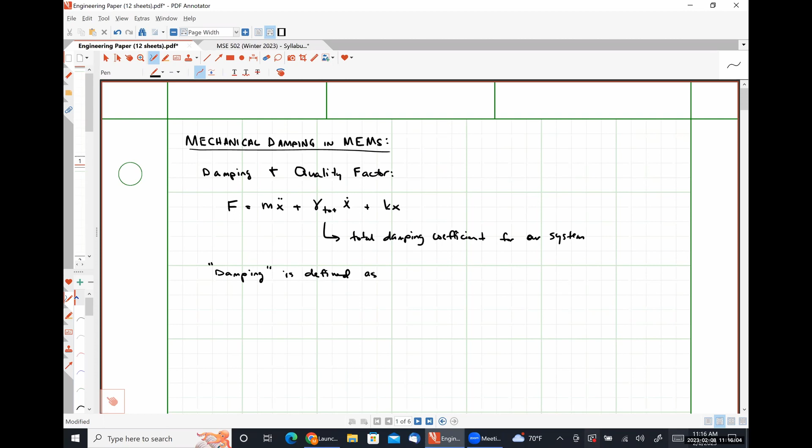Okay, so damping is defined as the restraining of vibratory motion by the dissipation of energy.

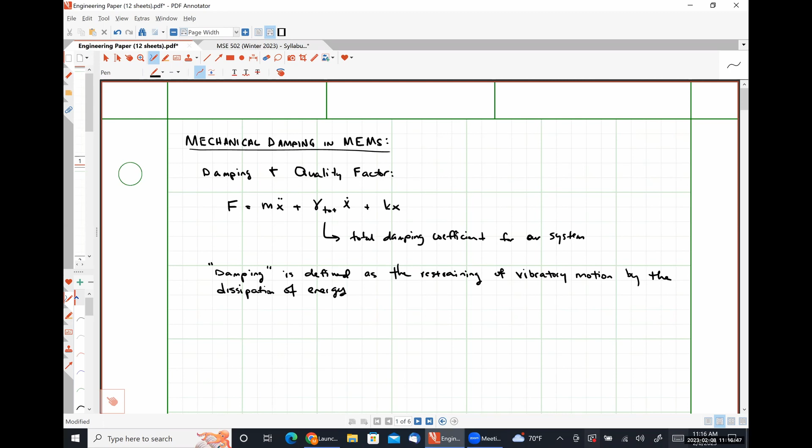So we just talked about how there are numerous damping mechanisms in MEMS. So when multiple loss mechanisms are present, the damping forces add, and the total damping coefficient is simply the sum of the damping coefficient associated with each of the different loss mechanisms.

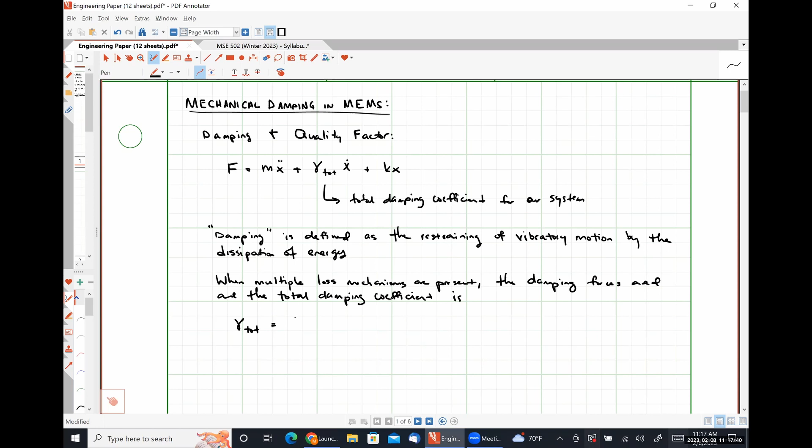So gamma total would be gamma 1. Why is this not writing? Plus gamma 2 all the way out to some gamma n, where each of those individual gammas represents, again, the damping coefficient for each particular loss mechanism. Okay. Our damping coefficient is measured in Newton seconds per meter. Okay.

It is actually relatively uncommon to deal with damping coefficients by themselves. Instead, most engineers talk about mechanical losses in terms of what's known as a quality factor. So, quality factor is often used to represent mechanical losses in a system.

Okay. Quality factor is defined as the ratio of the initial stored energy to the energy lost in 1 radian of oscillation for a vibrating system, okay? So from this relationship, we can see that Q and gamma have to be inversely proportional because Q represents stored energy over losses and gamma itself represents losses.

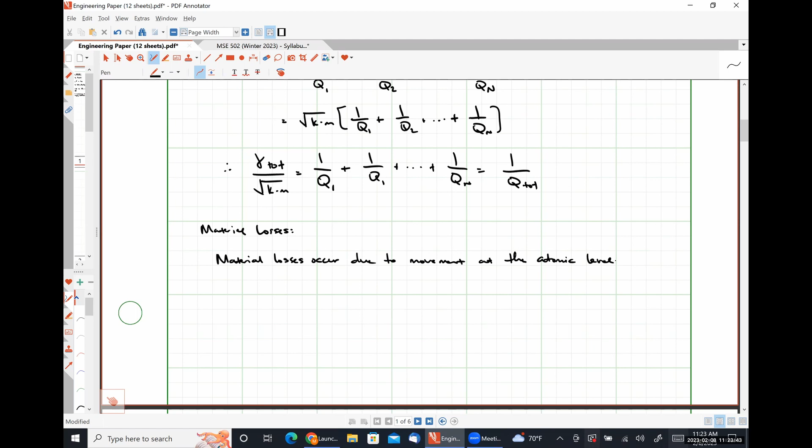So material losses occur due to movement at the atomic level that results in the generation of heat. Losses due to phonons. Yeah, so it's like an internal friction. As the atomic structure of the material vibrates, it heats up because of interactions between the individual molecules that make up the material itself.

So this internal friction or these material losses is the intrinsic limit because this is the material acting on itself, creating some form of energy dissipation because it's converting energy into heat with everything else ignored. So this is the best case scenario, right? So the quality factor associated with material losses is the highest number, right?

These material losses depend on temperature, the vibrational frequency, so what frequency we are exciting our system at, and the vibrational mode

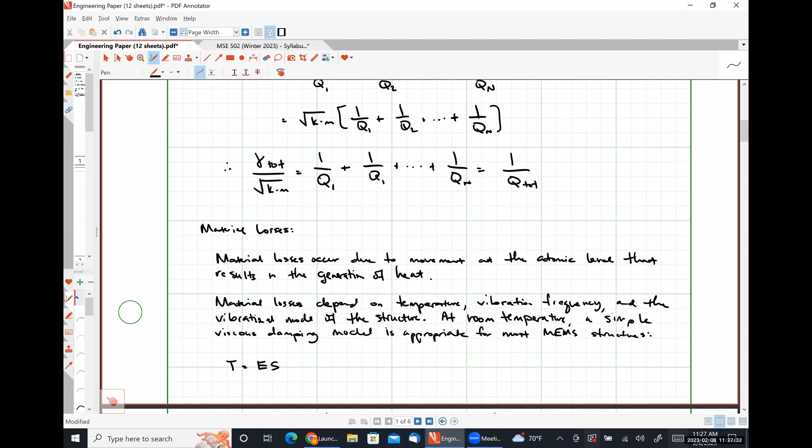Okay, so at room temperature, a simple viscous damping model is appropriate for most MEMS structures. So we are going to simply take our regular stress strain relationship, T is equal to ES, and then we are going to introduce viscosity into our equation. So this is mu gamma.

Viscosity, making sure I spell it right, measured in Newton seconds per meter squared. And this viscosity acts on the time derivative of our strain. So in the frequency domain, much like we've done other times, taking the derivative with respect to time is multiplying by a factor of j omega. So this is going to look like ES plus j omega mu gamma times S.

So this term here represents elastic damping losses for a particular vibrational mode.

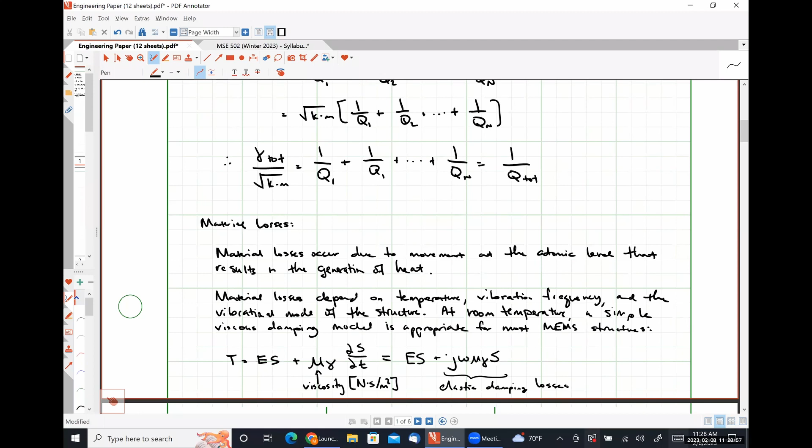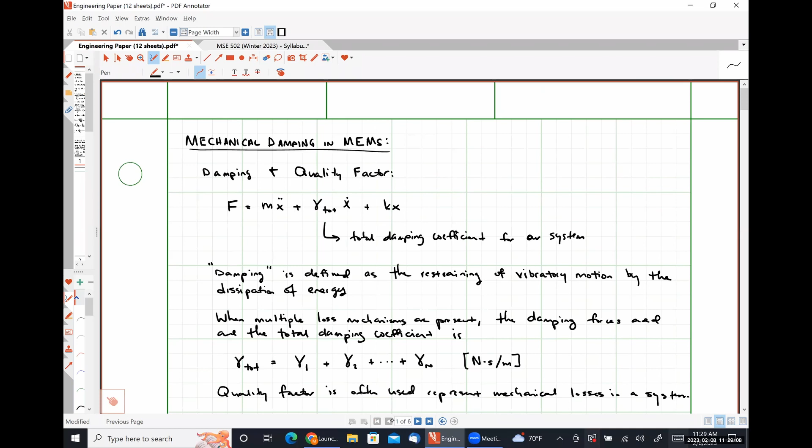Is it okay that I went to the next page, or do I need to go back? Oops, too far. All right, so I don't know how I finally managed to get it to scroll pages instead of jumping to the top of the next page. I'm just gonna not touch anything because I wish it would have been doing that for months.

So the quality factor associated with material losses, I'm going to give it subscript QI. We'll talk about why that is in a minute. It's simply the Young's modulus divided by our viscosity multiplied by our vibrational frequency omega. So this is QI because this is commonly called the intrinsic quality factor, which once again represents effectively the highest possible quality factor that could be achieved.

Now, something that's fairly interesting here is that E, Young's modulus, is a material property, and viscosity, mu sub gamma, is also a material property, which means the product of our frequency and our quality factor has to be a constant. So this really represents a scaling law for MEMS devices, right?

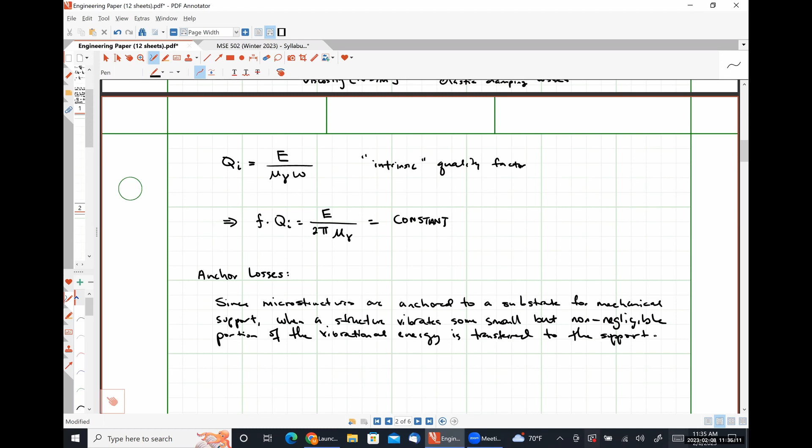So anyway, since microstructures are anchored to a substrate for mechanical support, when a structure vibrates, some small but non-negligible portion of the vibrational energy is transferred to the support. So these are what we call anchor losses.

These anchor losses depend on the location of the support point and the type of anchoring used. So the reason why we're not going to introduce a whole heck of a lot of math here is because analytical analysis is practically impossible to do to determine this. We have to use computer simulations and all that kind of stuff to do this for the most part.

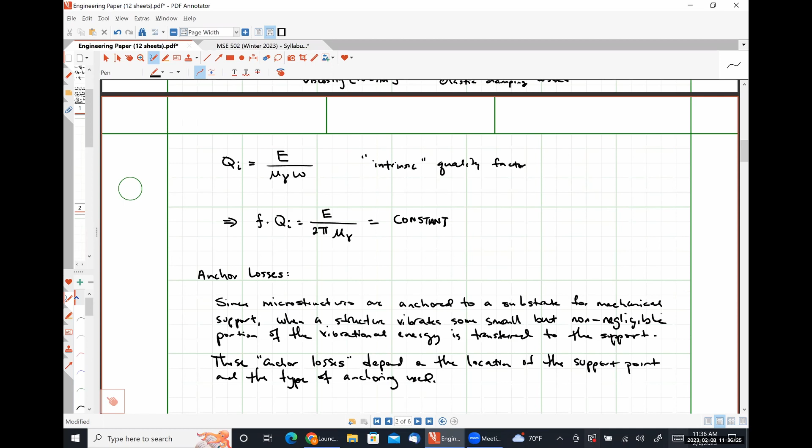Now, on many occasions, we don't really particularly need a high quality factor. So we don't care a lot about the energy that's transferred into our support system. So for an example, in an accelerometer, anchor losses really aren't that big of a thing. And in actuators, it's not really that big of a thing either.

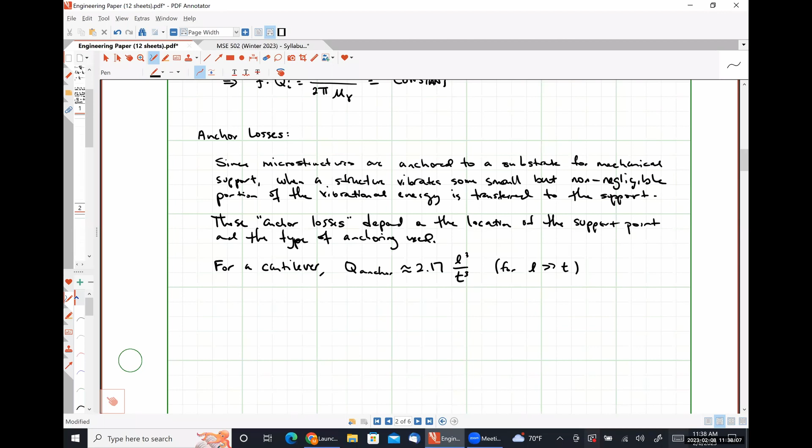That being said, if we have something that we are trying to utilize as a resonator, we typically want to minimize the anchor losses as much as possible because that's literally wasted energy that isn't getting transferred into the vibrational mode that we're trying to establish. So there are some methods here that hopefully qualitatively will make sense to understand why they're used to reduce anchor losses without any numerical support.

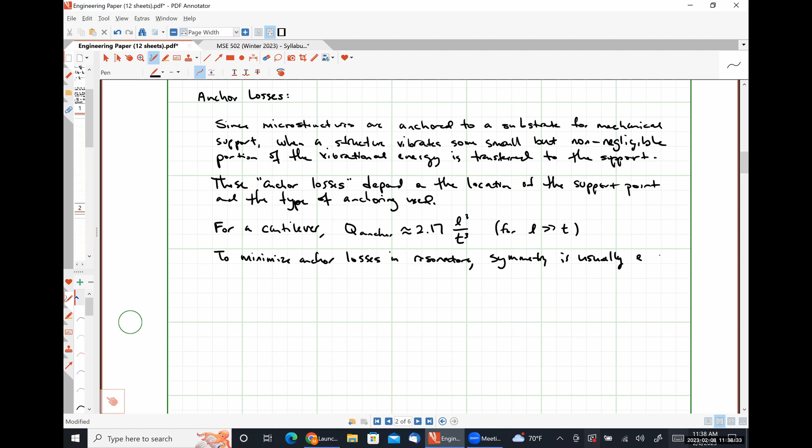So to minimize anchor losses in resonators, symmetry is usually exploited. So I'm going to give you guys a couple of examples here of simple structures. So this first one is what's called a tuning fork resonator, okay? And so we have an anchor on both sides. Now, if we had a single beam, we would experience reasonably high anchor losses for this.

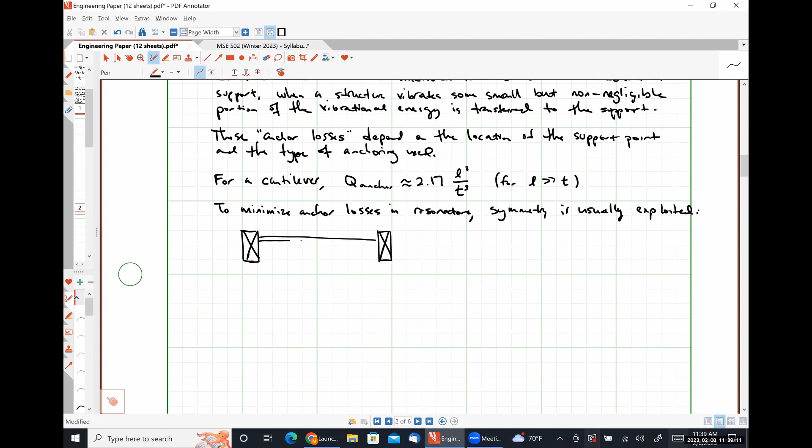So instead, what designers usually do is put two beams in parallel, so that when the system vibrates, one of the beams deflects up and the other beam deflects downward. So let me call this real quick. This is a double-ended tuning fork.

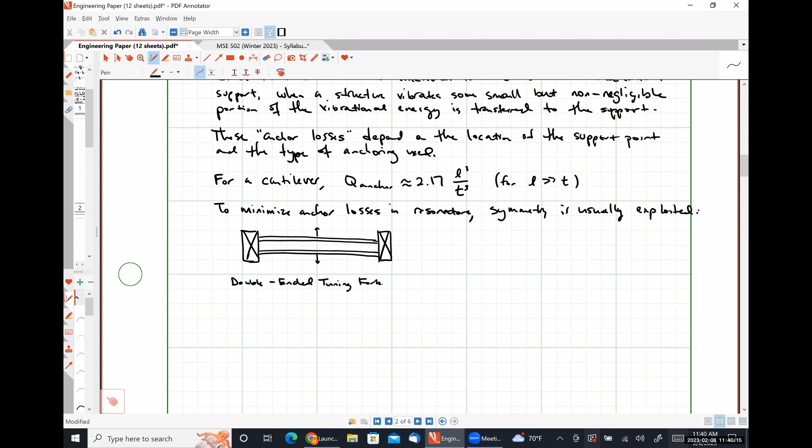So the stresses from the two different resonator arms cancel each other out at the anchor points because they're deflecting in equal but opposite directions. If there is no net stress and strain on the anchor point, there's no energy lost to the anchor point, or the energy lost to the anchor point is significantly minimized. So this is one way that symmetry is used to minimize anchor losses.

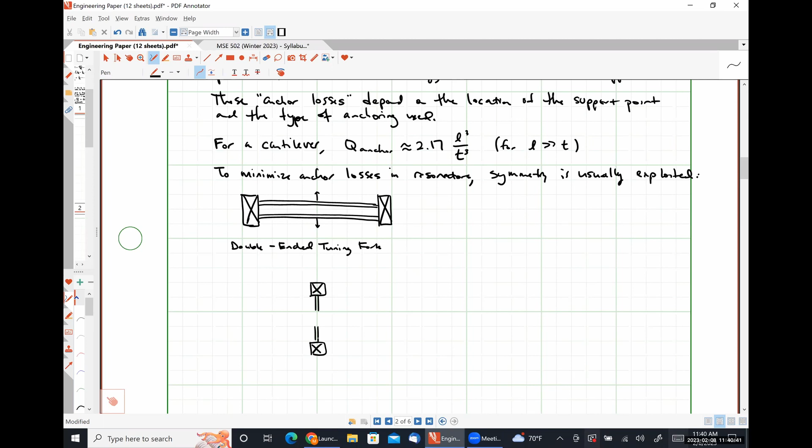Another way, for a different resonator structure. So this would be a longitudinal mode resonator. So let's say that we have an anchor point up here and an anchor point down here. And so this one is choosing the anchor points at a location where the net stress should be zero. So if we have a longitudinal mode resonator, so effectively something like a piezoelectric resonator, where we can cause this material to contract and expand in the indicated direction.

Well, if we locate our anchor points at the nodal point of the resonator where there is no stress, we get no anchor losses and therefore very high quality factors. So effectively, we electrically excite this system and it's vibrating in and out like so, which is how quartz crystal resonators usually work. And we wind up getting very, very low anchor losses and therefore very, very high quality factors, important for resonators where we're using it as a timer. Okay, so that's another way that it's done.

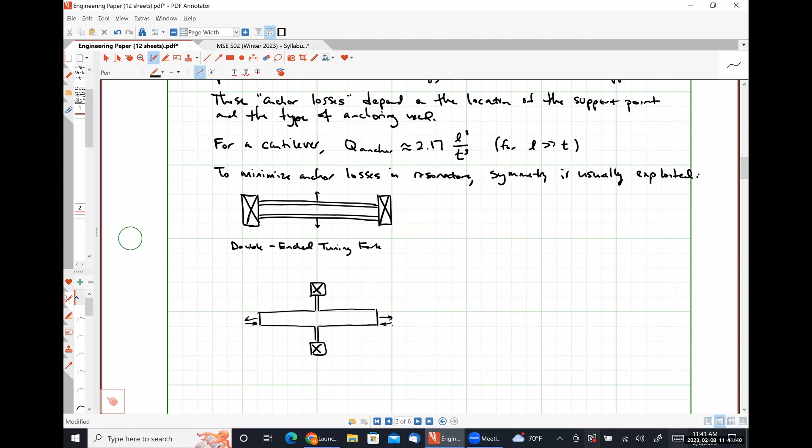This is a longitudinal mode. Let me write this down. Beam resonator, where the location of the anchor points is what's giving us low anchor losses. And then over here on the right, I'm going to draw one more. And so this is going to be a torsional resonator, and it uses a slightly different strategy.

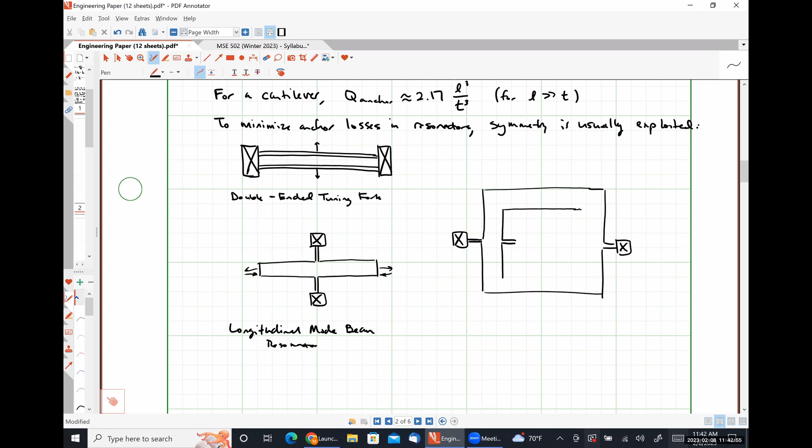Drew that line too long. So this is kind of similar to that magnetically actuated rotational gimbal that we looked at earlier, but the purpose is significantly different here. Okay, and also we only have a single axis of rotation. I'm just trying to put this in a frame of reference to something that you guys have seen, right? So we have a torsional spring here, and the same thing on the other side.

We have an outer resonator and an inner resonator. Because the outer resonator literally contains more material, it has a larger mass and therefore a lower resonant frequency. So effectively what happens in this structure, which is a torsional resonator, the inner resonator will resonate at one particular frequency, a high frequency, and the outer resonator will resonate at a low frequency.

And so all of the vibrational energy of the inner resonator effectively gets decoupled from the anchor because of the outer resonator. Okay. So the losses that are experienced are not in the primary vibrational mode. They're in the secondary vibrational mode of the outer resonator. So that's another means by which anchor losses are minimized.

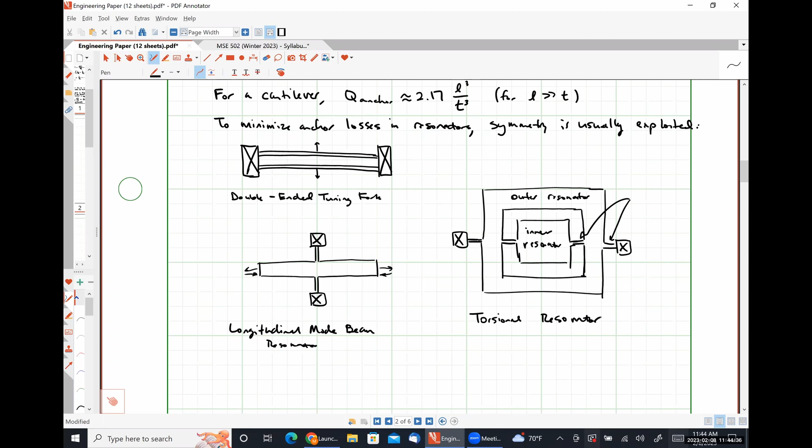Let's talk about surface losses now. We talked about this briefly a little while ago. This discussion is going to be just as brief because there's practically no information on it, or at least nothing really about quantifying it. So surface roughness. Surface contamination.

And the presence of oxide layers, which to my understanding is really just another way of expressing surface roughness, because oxide layers are usually amorphous, so they don't have a nice flat polished surface. Presence of oxide layers may mean the difference between intentional surface roughness and surface roughness as a byproduct of the process. Yeah. So this can all reduce Q of a structure. So that's literally all the information that the textbook had.

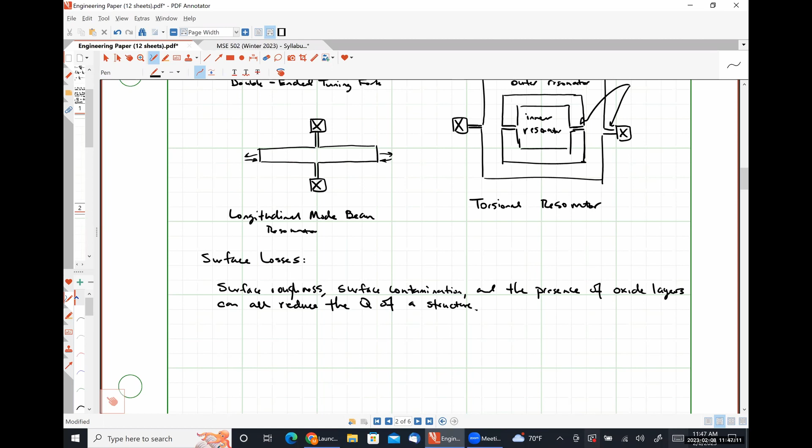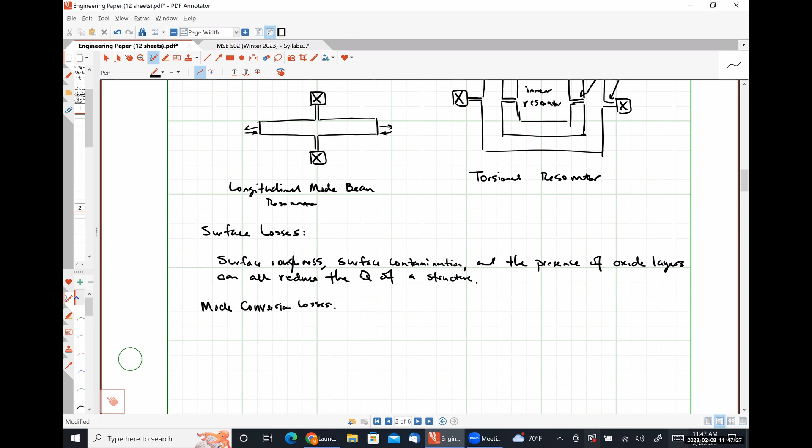So if we have, so let me write this out. For a resonator, ideally, only a single resonant mode should be excited at a given time. That's going to give us the highest possible quality factor. If the structure has multiple resonant modes with similar resonant frequencies, some vibrational energy can be transferred to these parasitic modes.

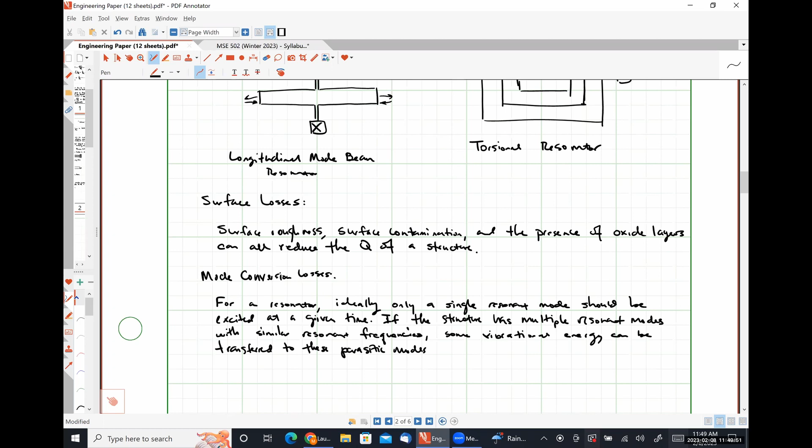So imagine that you were trying to make a resonator out of a cantilever beam, and the thickness of the beam and the height of the beam were of similar dimensions. You would expect the resonant frequency of each of those modes to be close to each other. And if you're transferring energy into one vibrational mode, you can get sympathetic resonance in the other mode. The total quality factor, so we'll see,

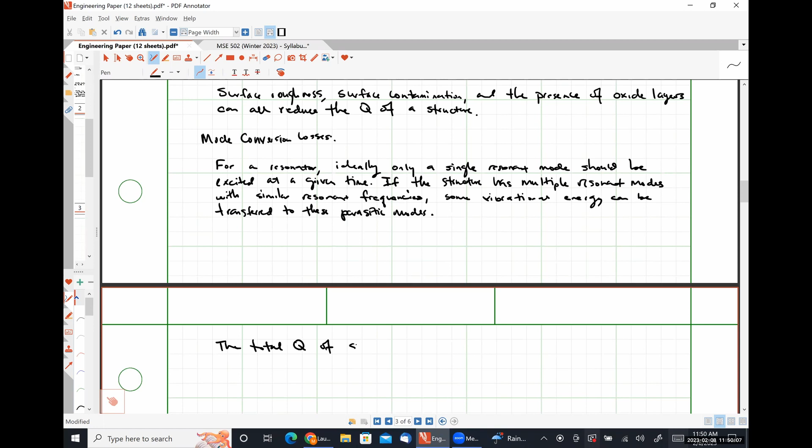is given by 1 over Q total equals A1 over Q1 plus A2 over Q2, all the way out to A sub n over Q sub n for n parasitic modes, where A1, or actually let's call this A sub i, is the fraction of total energy in mode i. Okay.

So as a quick example here, let's say that we had a resonator with a quality factor of 100,000 and 99.9%, because that's what I did the math for, of the energy is associated with this first mode. And the quality factor of the second mode is 100, and only 0.1% of the resonator's total energy is associated with that second mode. What we'll find is that the total quality factor is 0.999 over 100,000 plus 0.001 over 100. Take the reciprocal of this thing, and our quality factor reduces down to 50,025 and some change, right?

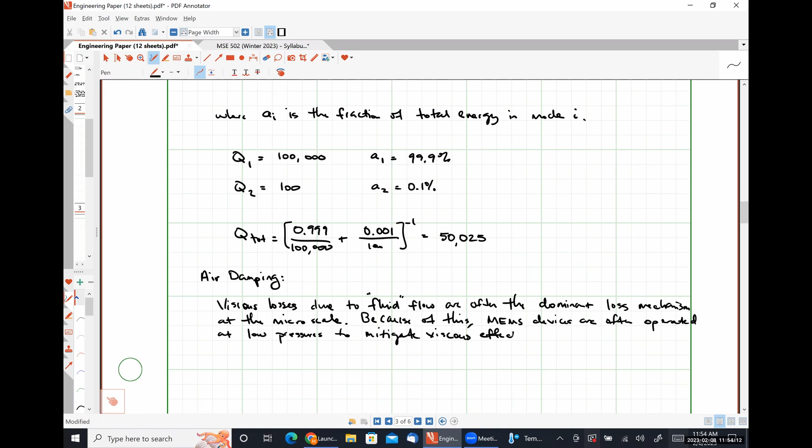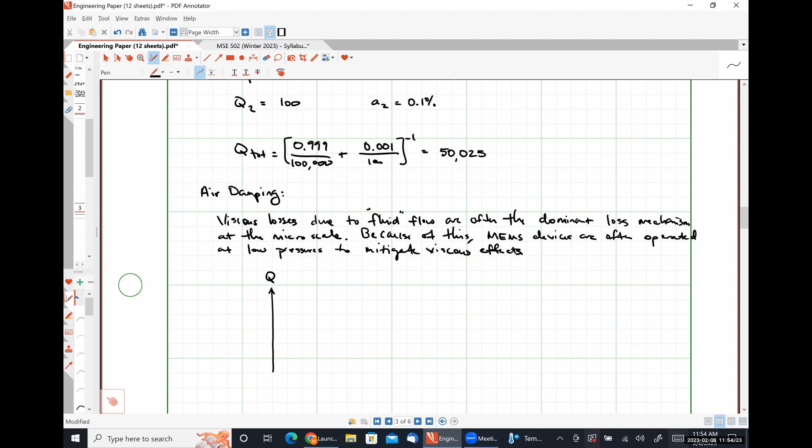So our textbook has a graph that I like, so I'm going to draw it for you guys here. It's pretty simple and straightforward. This is quality factor as a function of pressure, and then we'll get a little bit more into the math behind this relationship in a moment. Okay. So on the vertical axis, we have quality factor. On the horizontal axis, we have pressure. And we're going to have something like this, and I'm drawing it in the opposite direction that we're going to look at it, which will make sense in a moment, right?

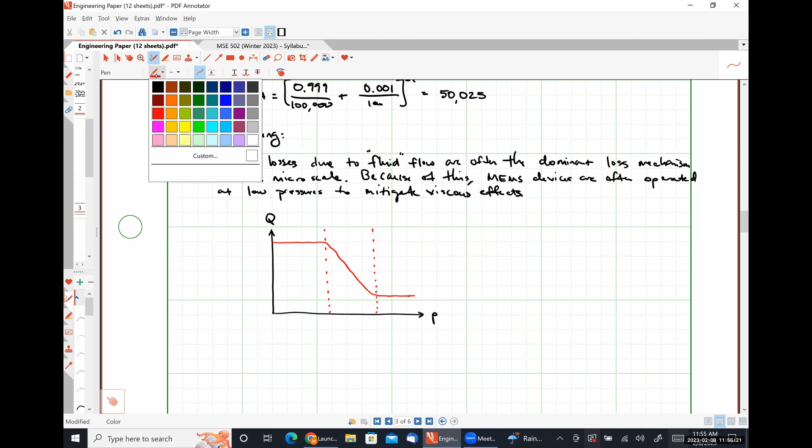So for very low pressures, we typically observe very high quality factors. And then we have this region here. And then as our pressure approaches atmospheric pressure, we typically have constant but relatively low quality factors. So we're going to define these regions and explain why we get this behavior. But before we do that, I want to introduce one other little thing here.

So in this region of very high pressures, the mean free path of gas molecules is typically much smaller than the critical dimension of our device. So let me write this down. So gamma is the mean free path of a gas molecule or an air molecule.

And DC is the critical dimension of the microstructure. And then in this middle region, we have gamma greater than our critical device dimension. And then in this region, our mean free path is much, much greater than our critical device dimension.

So what do I mean when I'm saying mean free path? Any of you guys heard of that term before? Any of you mechanical type folks know what mean free path means? Okay, so mean literally means average here. So it is the average distance traveled between interactions, okay? So for a system like this, what we're meaning is the average distance traveled before we hit a gas molecule.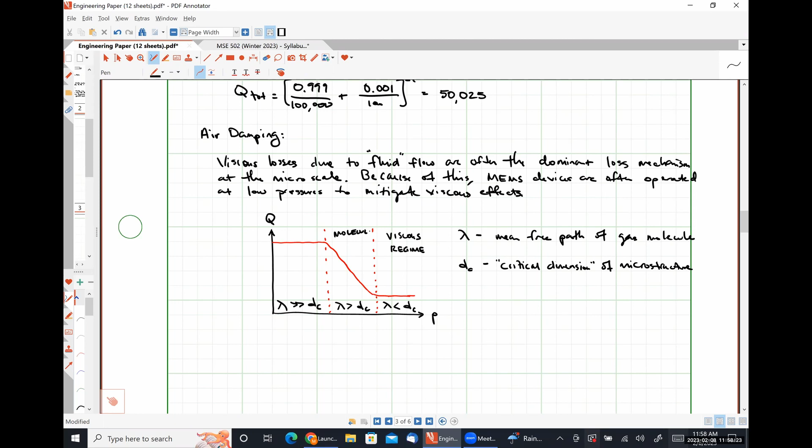As we lower our pressure, we get into the molecular regime. So this is where our device is going to start interacting with individual molecules because our mean free path is on roughly the same scale as our critical dimensions.

Before we go on further here, let's talk about critical dimensions. So if we have a microstructure, what do you guys think the critical dimension might be? It's going to depend on the microstructure. So for a microfluidic channel, typically the diameter of the channel is the critical dimension. If we had a capacitive accelerometer or something like that, the distance between the plates is our critical device dimension. So it's really the smallest dimension in our system that means something, right?

On the very left-hand side, we are operating at extremely low pressures, meaning that our mean free path is very long, and so we are not getting a lot of molecular interactions. This is the intrinsic regime, where effectively air damping is completely negligible.

You have a question, Hayden? Or you... No. Yeah. Okay.

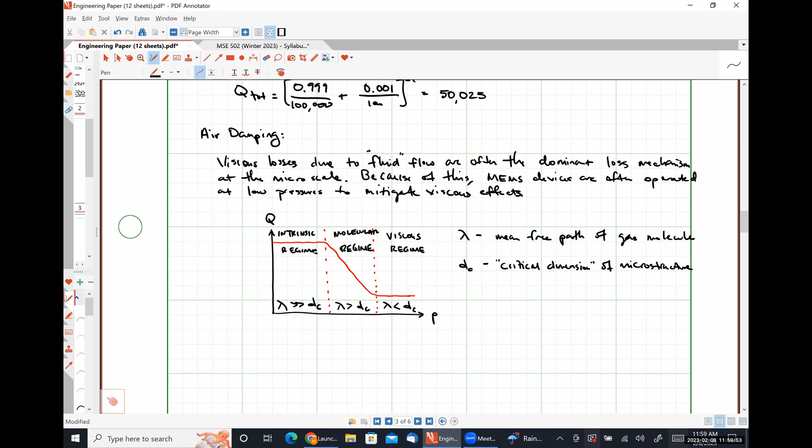So these are the different regimes that are available. Most MEMS structures are operated at pressures in the molecular regime because full vacuum packaging costs a lot of money. So we remove some of the pressure.

You can save that in space. And get the cost of it. Very much so, yeah. Just manufacture everything. Is it like $1 million per kilogram to move it up there or something like that? Part of that cost comes into reusability, so SpaceX can bring it down, and some of the companies have these technologies to increase the turnover rate. Really, it just costs a lot to make something here and then put it in space. Yeah. Like throwing away the airplane after every flight. Yeah. All right.

So we are going to look at models for air damping in this regime. And to do that, we need mathematical relationships for the things we're talking about. So our mean free path, lambda, yep, you're right, lambda, sorry. Lowercase lambda is RT over the square root of 2 times pi times dg squared times NA times P, where let's define some things here.

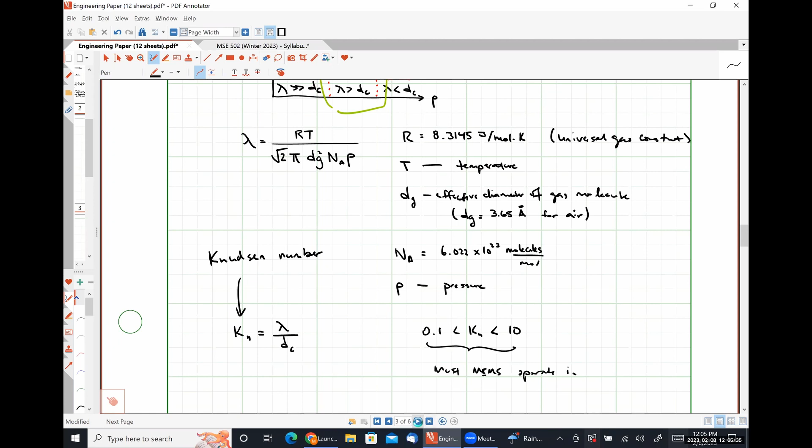So with these two quantities, we can now talk about mathematical models for the different types of air damping that we are going to most commonly see in a MEMS device. Okay, so the first one that we're going to talk about is squeeze film damping. So imagine that we have a plate. It is movable. And then down here, we have a substrate that is fixed.

If we were to apply a force to this plate, it would have some velocity in the down direction. And what squeeze film damping represents is literally the air squeezing out from between the plate and the substrate as the plate travels towards the substrate, right? So there's a couple of things here that we need to consider. If our velocity is small, we're effectively giving air plenty of time to move out of the way, and so we just have a damping coefficient associated with it.

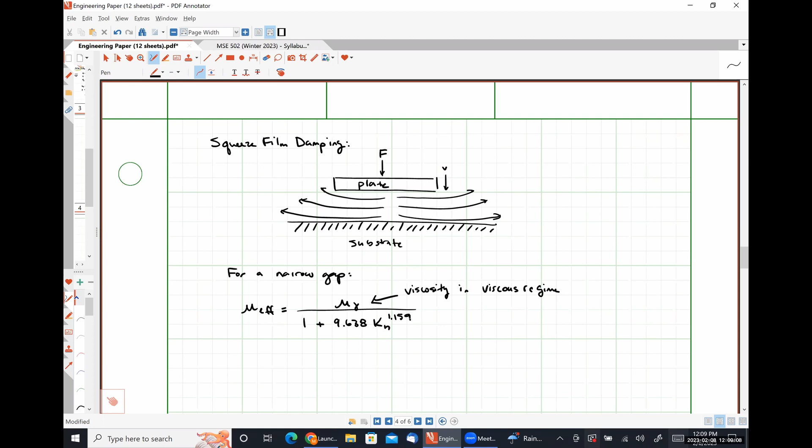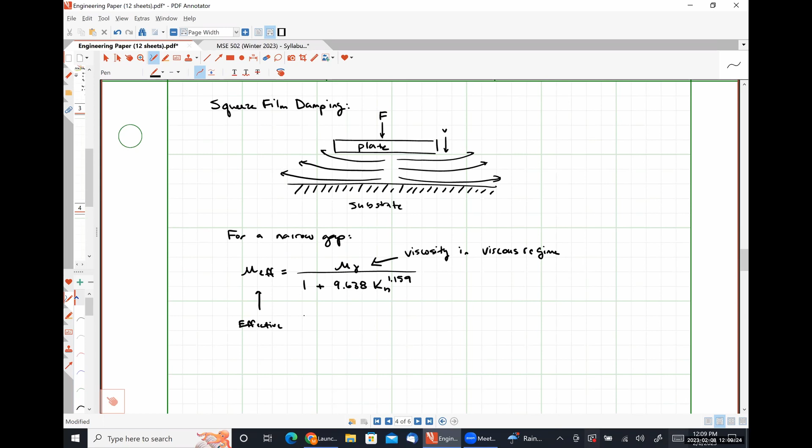We can quantify squeeze film damping by looking at the squeeze number. So let me write this here real quickly, actually. Effective viscosity. Then we're gonna look at our squeeze number, sigma SQ, because we have so many other sigmas. Mathematically, our squeeze number is 12 times mu effective times W squared, we'll talk about what W is in a moment, divided by P times D squared times omega.

So W is the width of our plate, where W needs to be less than or equal to the length, so that we have some idea of which dimension to use for a rectangular plate. D is the plate separation distance. And omega is our vibrational frequency.

So when our squeeze number is small, this represents air squeezing out without being compressed. When our squeeze number is large, this represents not giving the system enough time to squeeze air out, and we have compression. So large squeeze numbers represent the air behaving like a spring. Small squeeze numbers represent the air behaving like effectively a fluid that's getting squished out. Okay.

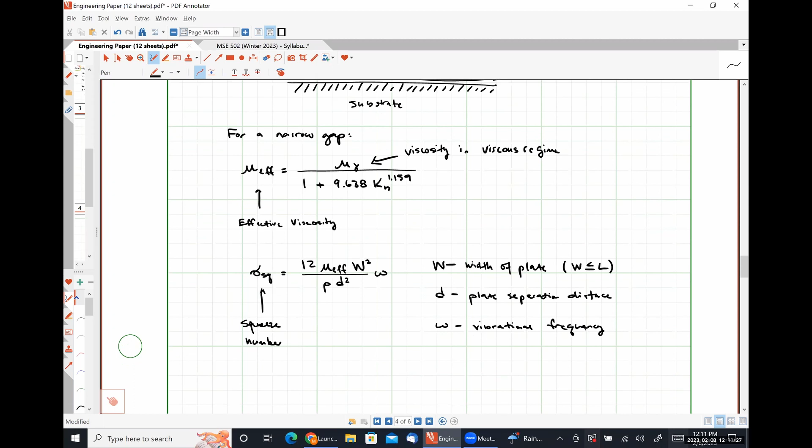So the damping coefficient for our squeeze film damping is given by 0.42 times the effective viscosity times A squared, where A is our plate area, divided by our gap cubed. A is plate area. And our spring constant, if we're compressing our air, is 0.25 times the effective viscosity squared times A cubed over pressure times distance to the 5th power times omega squared.

So this is if we have a solid plate pushing air out from underneath it as it travels towards a substrate, which is exactly what we saw in our gap tuned variable capacitors, when we had electrostatic sensing and actuation with plates moving towards each other. And we'll also see squeeze film damping in a capacitive comb drive when we have longitudinal movement, so when the fingers are moving closer to each other as opposed to moving back and forth with respect to each other.